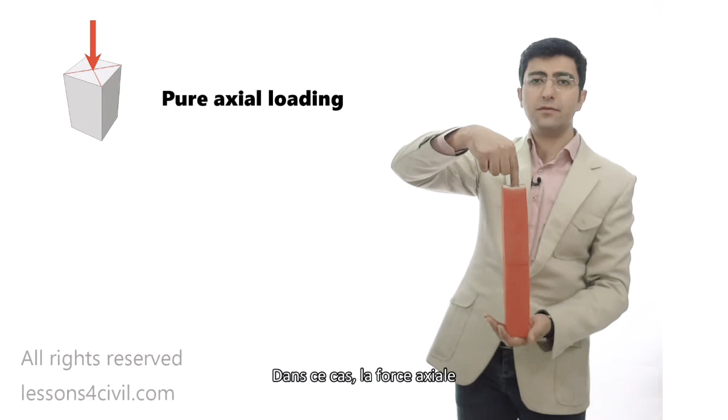Here I have a cubic member. If I draw the diagonals of the cross sections, I can simply find the location of the center line. Now if I put a force exactly normal to the cross section and exactly at the center line like this, the loading is called pure axial loading, which means there is no bending moment and there is no shear force. In such cases, axial force is transferred through the member, and as you can see, the deformation is symmetrical with respect to the center line.

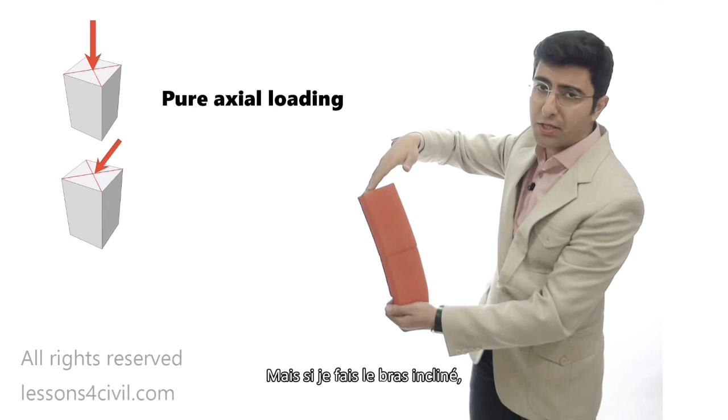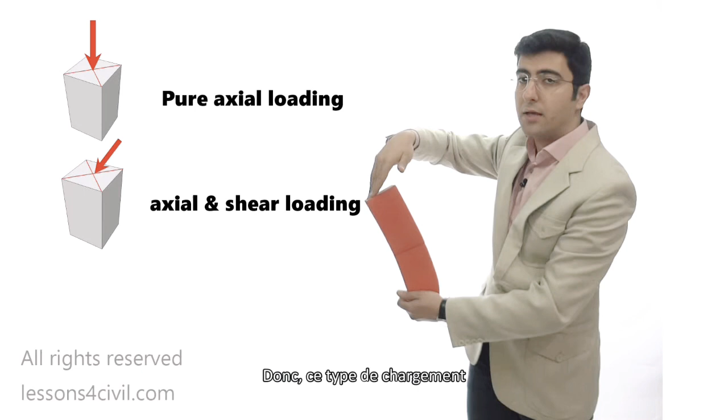But what if I put my arm at any given angle but 90 degrees? Well, as you can see in this case, the angles are going to change. Actually, this is mainly because my arm is inclined and not normal to the cross section. So actually, I'm applying a shear component. So this is not a pure axial loading condition.

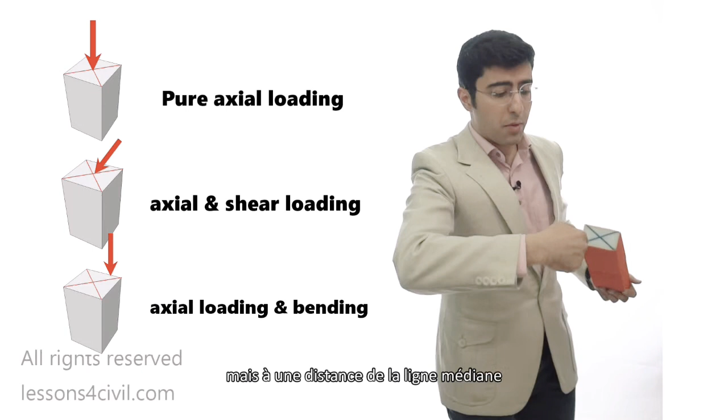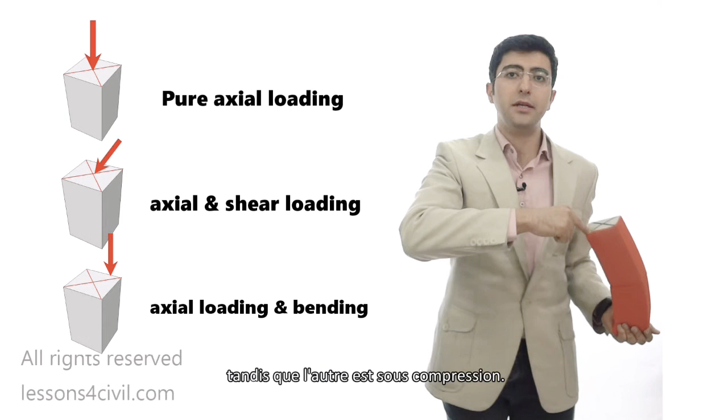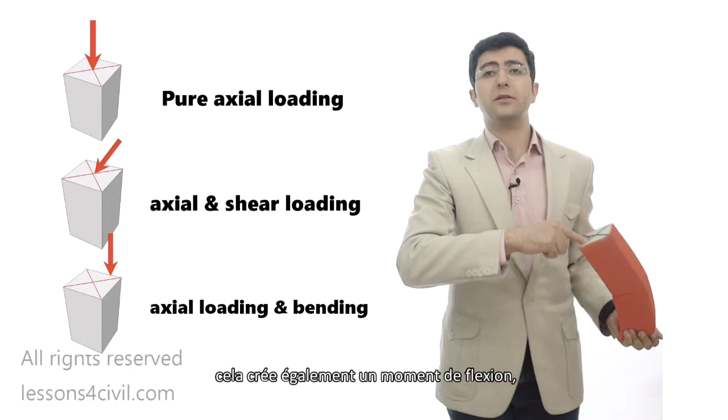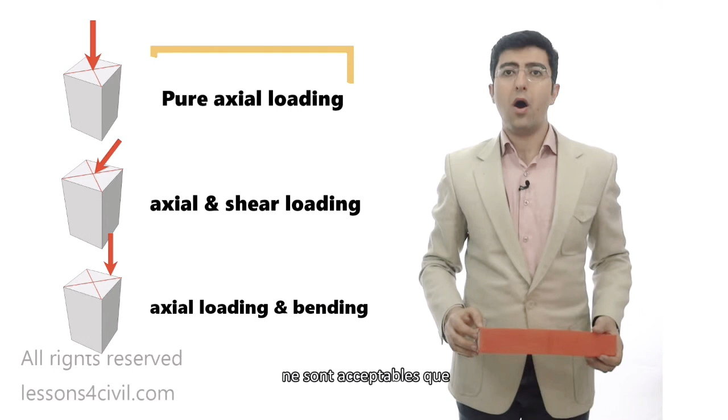And there is another type of loading, which is when I put my finger normal to the cross section, but within a distance from the center line. As you can see, in such cases, one side of the object undergoes tension while the other side is under compression. And why does such a thing happen? Well, this is mainly because when the load takes distance from the center line, it also creates a bending moment. And again, this is not a pure axial loading. Please bear in mind, all of the equations I will give you in this lesson are only acceptable under pure axial loading.

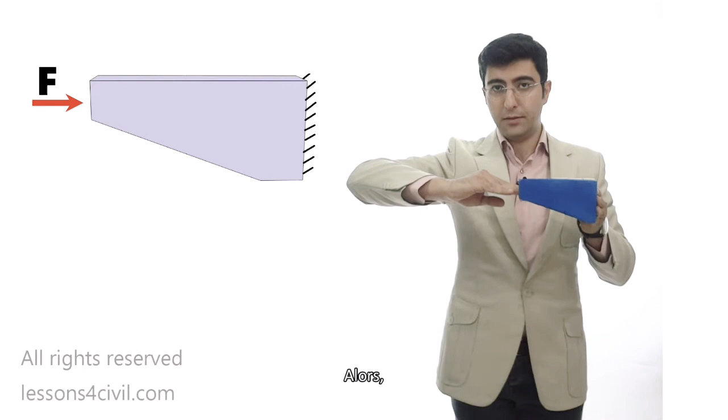Okay, so what happens inside the material when the member is under axial loading? Well, in simple words, the axial force transfers along the material to reach the end, and there it is counteracted by the reaction forces applied by the support. In this case, for example, my left hand is the end support. If you draw the free body diagram of any part of this object, you can simply find out that along the member the amount of axial force remains the same.

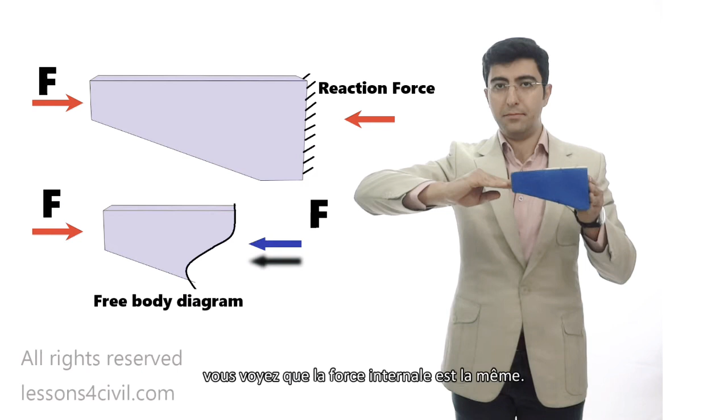But what about the amount of axial stress? Is it always constant along the member? Well, definitely not. As you know, axial stress is equal to normal force divided by the cross-section area. So if the cross-section area is variable, like this object for example, the amount of axial stress is going to be different from one section to the other. In this case, cross-sections are different and the same amount of axial force is going to create different amounts of axial stress.

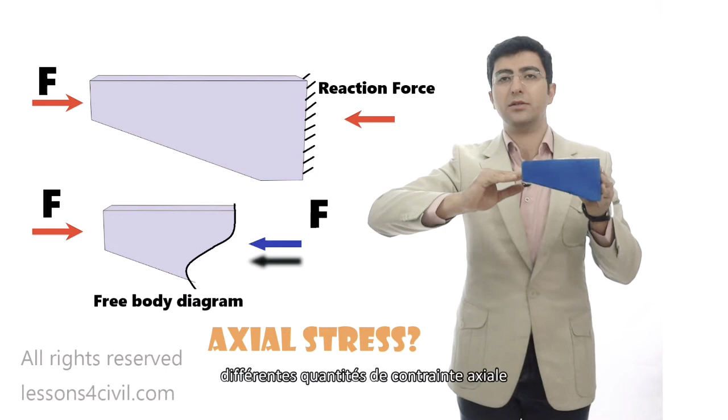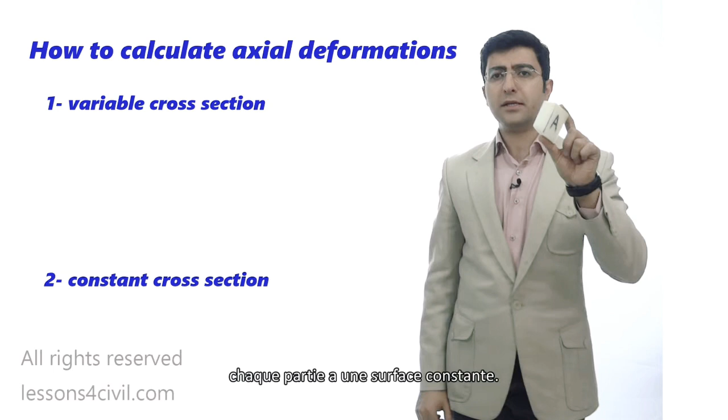And now here we go to the main part of this lesson, which is about how to calculate the amount of axial deformation. First, I explain it for a typical member with variable cross-section, and then I will simplify it for members with constant cross-sections. The general strategy we use to study a member with variable cross-section is to divide it into smaller parts, just like this. The main advantage of this method is that the change in cross-section in any tiny part is quite negligible, so we can assume the cross-section remains the same along each small part.

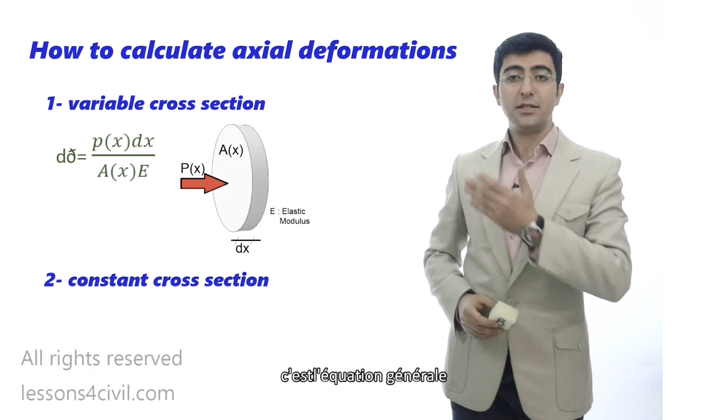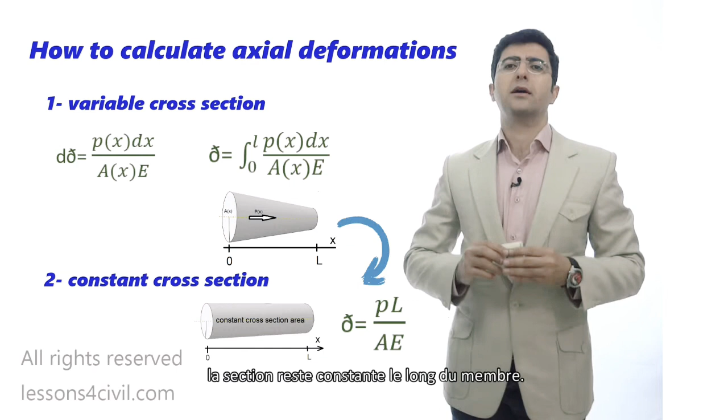So according to this formula, we can simply calculate the amount of axial deformation of each small part. And then by adding them together, we can estimate the overall deformation of the member under axial loading. This is the general formula to calculate the amount of axial deformation. Fortunately, in civil engineering, most of the structural members we use are manufactured with constant cross-sections. So if I find a way to simplify this equation, it would be very useful for us. The second equation here is actually a simplified version, provided that the cross-section remains constant along the member.

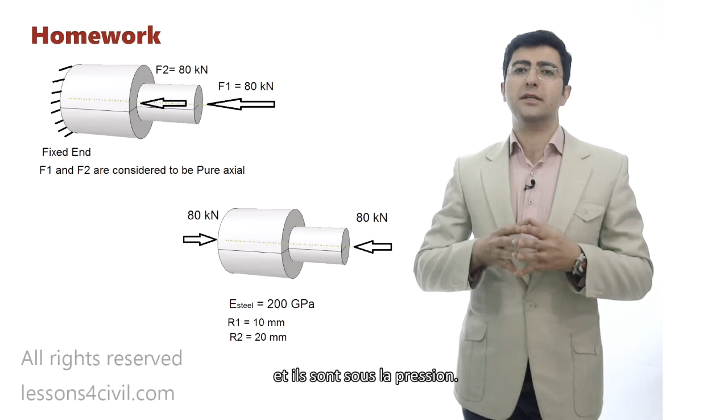Well, I think it's time to practice a bit. Here is a question. We have two different objects that are under a certain amount of axial loading. You have to calculate the amount of axial deformation for each object. And please don't be afraid to make mistakes. Write whatever you think. And remember, practicing alone is not useful unless somebody corrects you and identifies your mistakes.